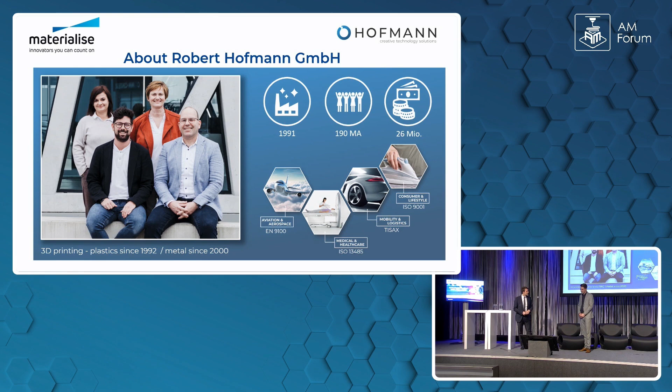Ever since back then, Materialise and Robert Hofmann have shared a really close relation since day one, basically. Yeah, we have more than 30 years of common and joint history. As everyone knows, it started with stereolithography, and it's not the idea to go into the past, but the topic is challenges and opportunities of 3D printing. And we're at the point where we are today because of all the work which was done the last 30 years regarding software, machines, material. And we are looking forward to pushing the boundaries, and we'll see what we'll have in the future.

I'm pretty sure that in the future we will continue our close relation and work together on the efficiency of the digital workflow. So Robert Hofmann has a really deep knowledge about 3D printing, but you're also very familiar with, let's call it, the conventional or traditional manufacturing methods. I would like to know how you see or define the role of 3D printing.

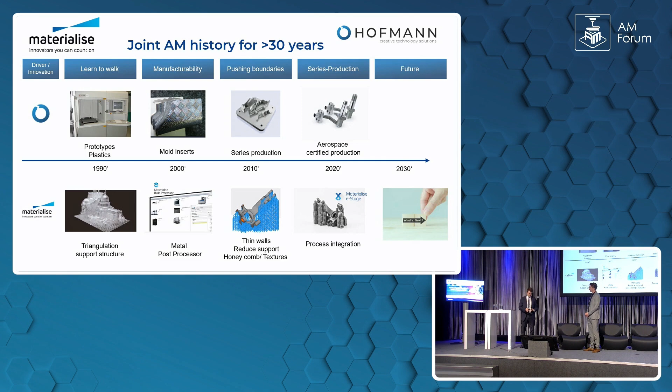Well, we heard it already in different talks today. 3D printing is one of the engineering tools or production tools from our toolbox. So the topic is challenges and opportunities of 3D printing. And on a really high level, the first biggest challenge and opportunity: to really understand 3D printing and its benefits, you actually have to understand the limits and the possibilities of the other technologies. So if you don't know what injection molding or casting or milling is capable of, you will never have success in 3D printing. So that's why we brought this slide. So understanding the whole world of production and manufacturing processes is the most crucial part to deep dive into 3D printing.

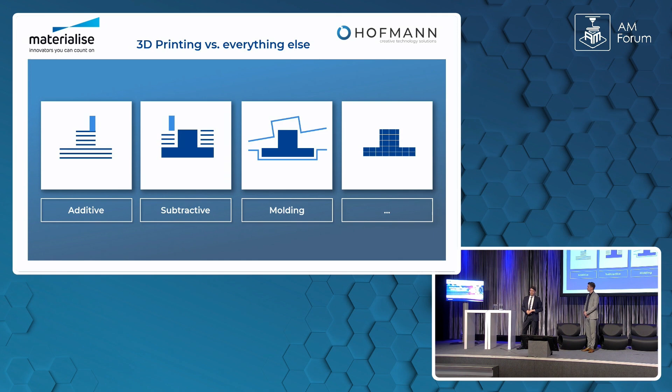And if we talk about the overview of just 3D printing technologies, AM Power has a really nice overview of all the possibilities we have within this one square. So understanding the possibilities and the limits of each of those 3D printing technologies is most crucial to help the customer choose what technology he can use for his special use case. Some technologies are really good for one thing, but really bad for another thing. So our daily approach as a service bureau is to really understand what the customer needs, and then out of this whole toolbox of manufacturing processes, to select the one which is most helpful for him at this point.

I talked about this first level. The second level of challenges and opportunities is something everyone knows. Prototyping is state of the art. Prototyping is something we have used 3D printed parts for for 30 years. What is growing, actually slower than we expected, is the aftermarket. So there are a lot of ideas and a lot of products which are already 3D printed for aftermarket. But due to the documentation and the challenges, they come from series production, from another technology. They try to implement this into 3D printing for aftermarket, and this is no success story. So you really have to do your homework, understand what 3D printing is capable of, and adapt your drawings and your process to bring in 3D printing for aftermarket.

And so everyone is looking for applications in 3D printing, and what is really crucial to understand: we do prototyping with 3D printing, then the quantity rises and we are in another production technology. Then the quantity goes down and maybe we can go back to 3D printing. So from our point of view, the most crucial thing is to understand where your dotted line is. At which point, regarding material, quantity, customers' expectations, do we have to switch technologies? An early part can be 3D printing, but in most cases series production will not be 3D printing. So don't even try to sell the customer a 3D printing solution when you know that injection molding, milling, whatever is more beneficial.

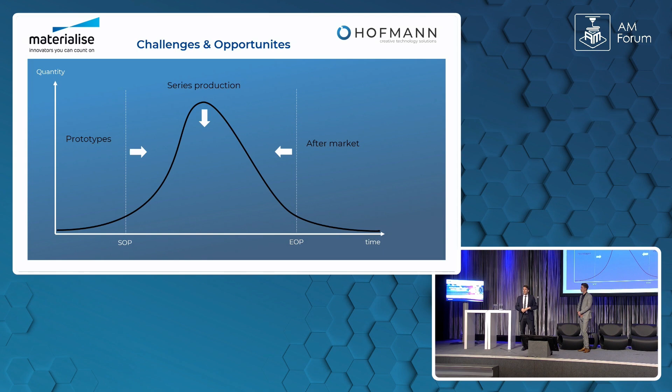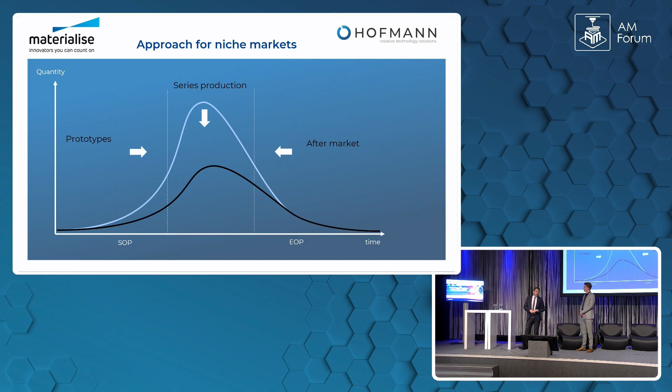So what we are actually looking for is applications where the quantities are lower. We want to go to niche markets where we really understand that the dotted line comes together, and at one point there will not be a dotted line anymore. So we develop a product starting from the prototype into series production until aftermarket, staying in one technology. We do not have any efficiency losses from changing production technology, but this is something which will not happen in mass high volume production.

So this is the second level of challenge and opportunities that we see right now. So what you're basically saying is that it is often better to look for those niche market projects than to continuously chase the holy grail of serial production. Can you give us an example of such a niche product that you made profitable or successful?

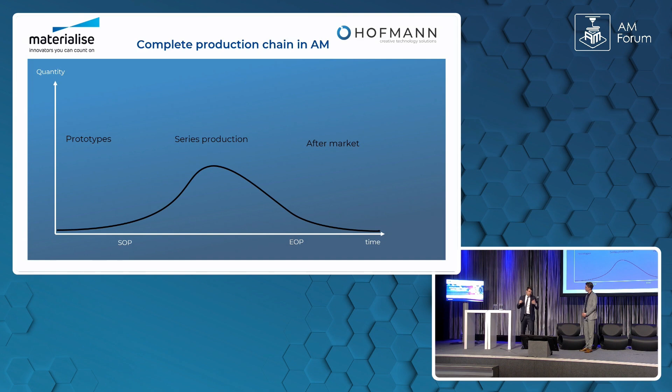Yeah, everyone is talking about aerospace and flying to the moon. We brought together a quite funny application from the horse market. It's an English word, actually I did not know before: equestrian sports. For the native speakers, this is a word everyone knows. I did not know equestrian means horse sport.

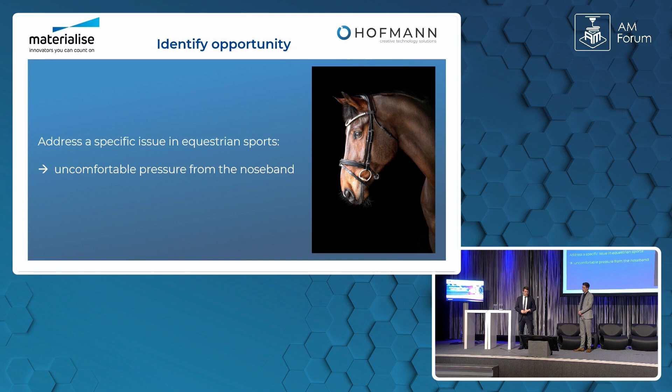So a customer came to us and said, well, usually we have a leather part for the nose of the horse. And especially for really professional horse riding, this is a problem regarding the pressure on the nose. And we said, okay, this is a really crazy application, but let's see what 3D printing can do. And we continued the approach with the customer.

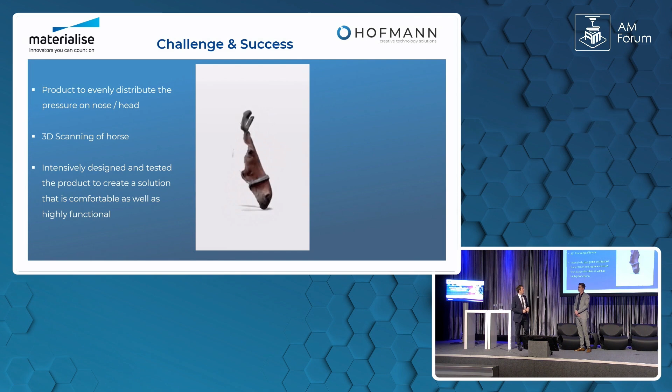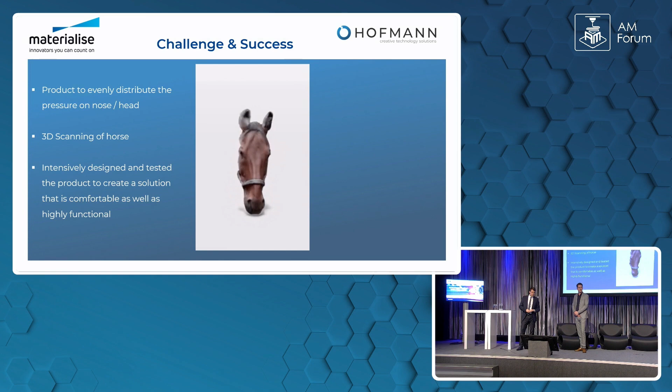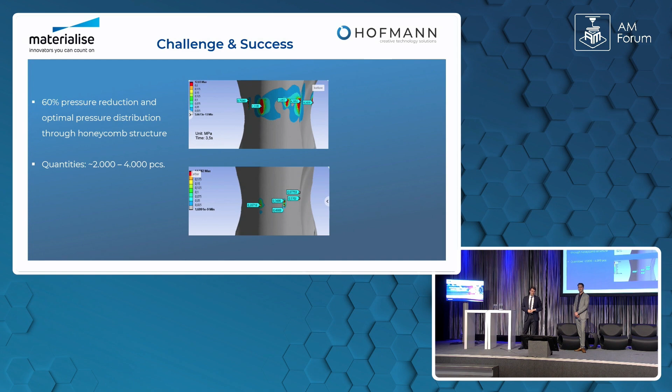So we first scanned the horse, part of the digital workflow. We had different prototyping iterations with the goal to reduce the pressure on the nose of the horse. You can say this is quite strange. We did intensive testing, intensive iterations, and also simulation, where the distribution of the pressure for the horse actually improved. And one of the results is that 60% of the point pressure on this horse is reduced.

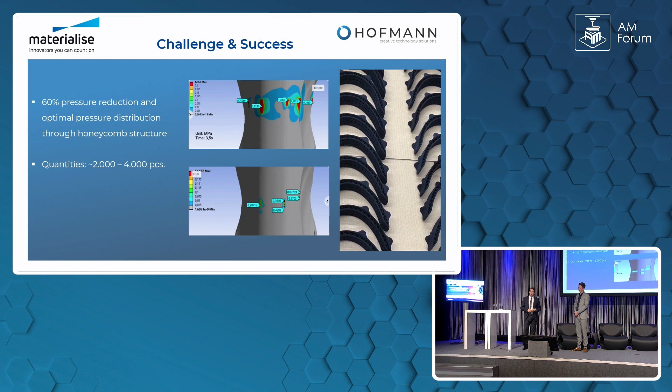And today this is an application where we produce up to 4,000 pieces a year for an absolute niche market. No one talked about horse sports before, equestrian sports. But this is one really, really nice example where 3D printing can be used where no one expected 3D printing.

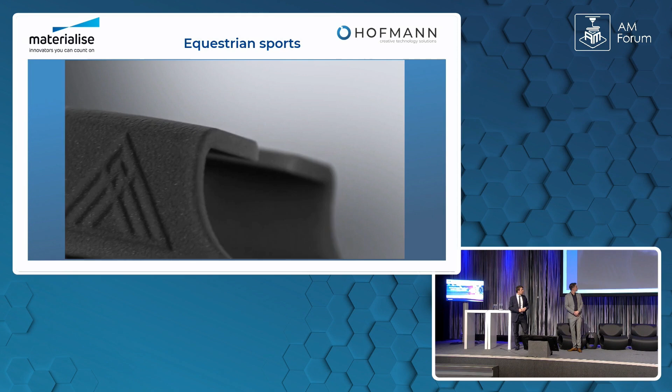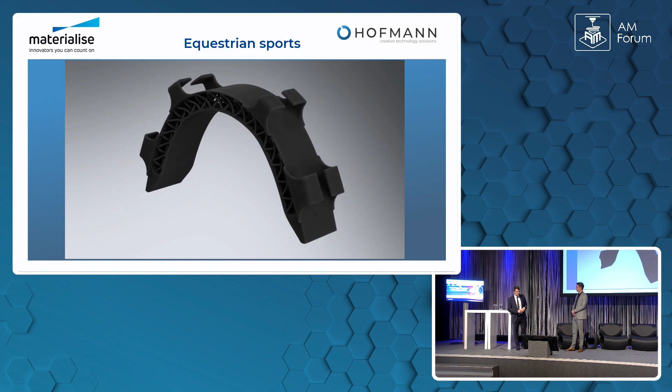To have a better overview of the part, we brought a little video of the details. You can have this fly through the part. It's a TPU printed Multi Jet Fusion part where the weight is distributed with those honeycomb structures. Yeah, indeed. It looks like a part that would be a nightmare to manufacture with injection molding. And in my opinion, a good example of a product that without 3D printing would not be possible in that way.

So we went into serial production of this part with all the post- and pre-processing which is necessary. The different advantages of 3D printing I mentioned, time to market and everything which is needed, is a full 3D printed part for serial production. The topic customization is also done in this project.

And what is really nice, which we did not expect, is that there are a lot of other parts on the horse which can be used in the same manner. So nowadays it's not only a nose strip, it's also a neck and a chin strip, where the same approach, the scan, the software, the product development with the honeycomb structure is exercised.

Yeah, in this case, 3D printing indeed played a crucial role, I think. It's a good example of a product that without 3D printing, again, would not be possible in a similar way, and of the capabilities of additive manufacturing in general and the opportunities that come with it. The efficiency of such a project or profitability, how does the digital workflow define that?

Yeah, the digital workflow is actually really important. I talked about the first level, knowing your technologies, the second level, knowing your market and the customer needs, and the third level regarding challenges and opportunities is to understand your whole 3D printing workflow. So start with the software, knowing the benefits and the limits of your software. Conventional software usually is not developed for 3D printing applications and 3D printing design.

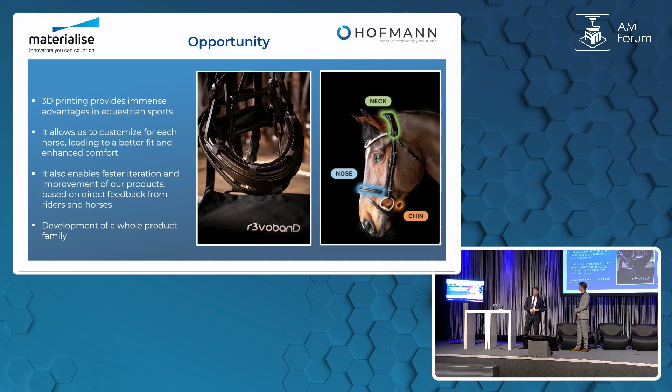One example we brought for metal: everyone knows conformal cooling, so this is something I will not talk about today. I will talk about a similar approach for particle foam parts. Everyone who knows EPP or EPS, expanded polypropylene, expandable polystyrene, it's processed by steam chamber. You inject water steam into a mold, and with this process you get a part where your foam particles are glued or merged together.

And then we have molds where we use lightweighting to have less material to be processed in 3D printing. The whole energy consumption is a topic for steam application which concerns everyone, especially during the last 2-3 years of energy prices going through the roof.

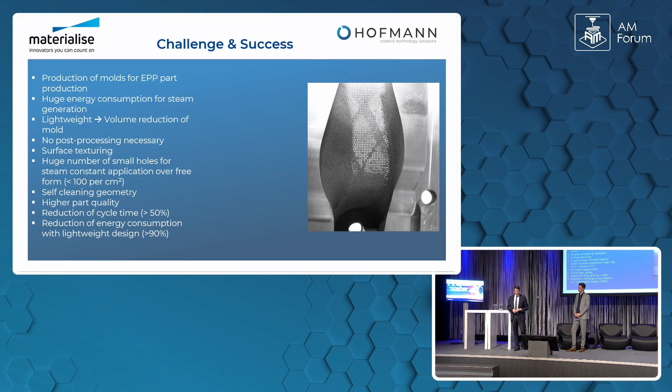As I said, we have a huge number of small holes which are almost impossible to conventionally produce. And also one big benefit using those type of molds is to reduce the cycle time. Due to less mass, you need less time to bring it up to the temperature, and you have less time to cool it down. So in the end, you save a lot of energy and can produce different foam applications like this example here in the slide.

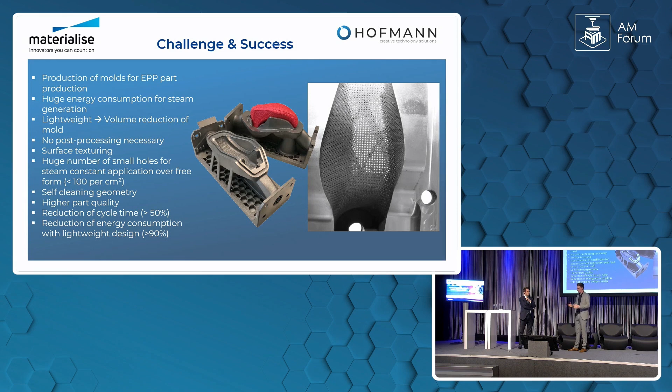Yeah, it's a great example of a metal part that without 3D printing would not be possible in any way. And then, if I understand correctly, that is only one example of a whole product family again. That is only one EPP application that you're doing, right? Yeah. So everyone who has been to physiotherapy might know the Blackroll product, which has been on the market a few years.

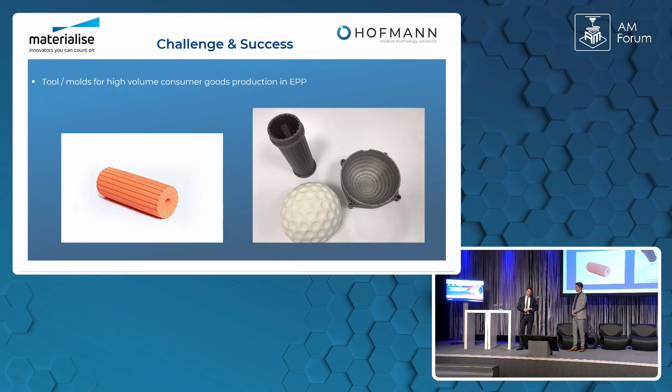So all the Blackroll parts which are on the market are produced out of this type of molds with millions of holes and the steam EPP process. So you're basically saying two very important things, in my opinion. Number one is you need to know your market and customer needs, as well as the capabilities and benefits of the technology you're going with. And by combining both of those, you can be successful or even more successful in niche application markets than chasing the holy grail of serial production. Yeah.

As I said and tried to mention, the first thing is you have to understand the limitations of your technologies, to deep dive into the possibilities of 3D printing in the broad area of materials, technologies, and that's why conferences like this are so important. The second one, you have to talk to your client and understand what is really his need. Do not print because it's cool or just a hype. Really try to get a solution for the customer, and 3D printing can be a solution. And the third thing is to understand your process chain and be an expert in your process chain to really push the boundaries and the limits.

Yeah. So I want to come back to the process chain here. In the near future, what field of improvement, in your opinion, needs to be addressed to enhance the digital workflow even further? I talked about the dotted line where you switch technologies. So to really have more applications and be more efficient, Audi said that the price has to drop by 100 times or 200 times. And this is what we also see. Many applications will not and cannot be done in 3D printing due to simple pricing.

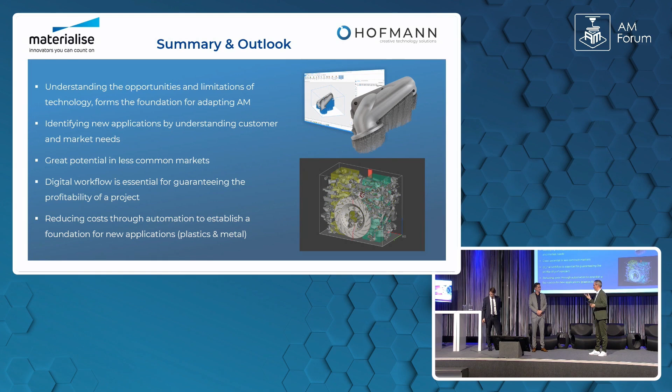What I like most, to be honest, is that you tackle different applications. And I think it's always important to mention that it's not always the big thing, sometimes it's the small thing. Just one question from my side before I let you go. The horse nose strap, is that something that is asked for very often? How many times is it sold? Well, as I said, we did not know this application. This is something we developed together with a customer who was looking into 3D printing and said, I have an idea, can you help us? And we have a lot of similar applications from not so common areas.

Yeah. So as I said, we are in aerospace, we are in automotive, but the really fun and funny applications are in industrial or consumer applications, which are not that common. And there we see high profitability because it's a traditional market where no one expects 3D printing to be used.